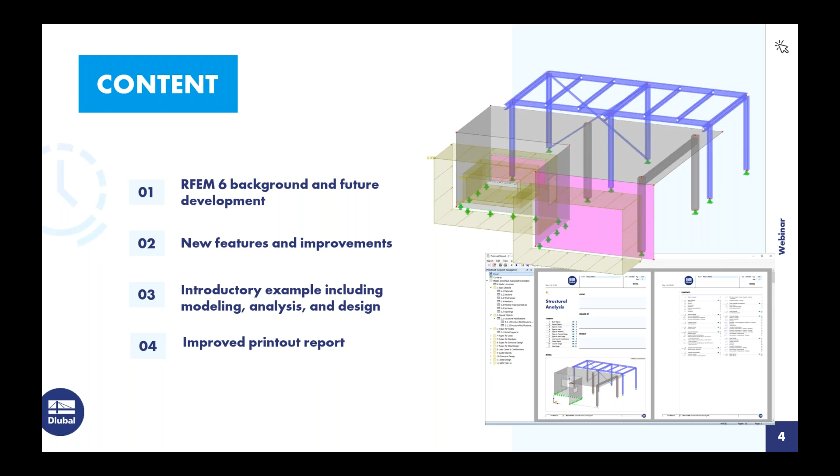So RFEM 6 was released several weeks ago. It was actually developed in parallel over the past several years with RFEM 5 as well. Now, this new program generation isn't just a minor modification of RFEM 5. Actually, we have completely rewritten the program in a modern framework programming language. This is C++ with Qt. So this first release will certainly include a lot of new features, but I do want to be clear that not all of the capabilities of RFEM 5 are yet developed for this first release.

And in particular, this might include glass design, cross-laminated timber, some BIM integration. So what we plan are several release phases for this ongoing development that you can expect in the coming months. What this also means is that you'll have frequent access to updates in the Dlubal extranet account. So for current customers with RFEM 6 and a valid service contract, we're coming out with these updates almost weekly now because development has been so heavy and rapid with this new generation.

However, we plan to fully support RFEM 5 for this 1 to 2 year overlap period. We definitely recognize that there's many users who need the capabilities for cross-laminated timber, for example. So you can continue using RFEM 5 as you would as normal. Again, we'll continue fully supporting that until those features are available in RFEM 6, then maybe you want to consider upgrading. There is forward compatibility with RFEM 5 to RFEM 6, so you can open these older models in this new version. For the most part, you're going to see a lot of the geometry, the loading carryover, but what you will now lose is the add-on module data. And the reason for this is that we have better integrated these add-ons in the main program, so there's no way to keep that compatibility between the two versions.

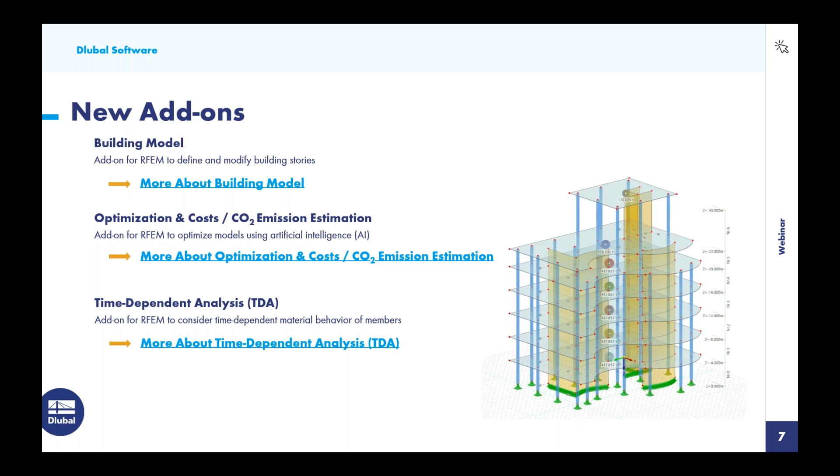Previously we saw in RFEM 5, we would complete the full analysis, then we can move into the design portion. Well, now we're able to do both the analysis and the design within one workflow for a much more efficient process. You'll also see the output of design formulas from the relevant standards.

Member and member set representatives, which you'll also see in today's example, allow us to group members together. Instead of setting individual settings for each member, we can now group them together to set input, such as for concrete, the reinforcement for an entire set of columns, or for beam design according to the AISC, I can set my unbraced lengths for a group of members.

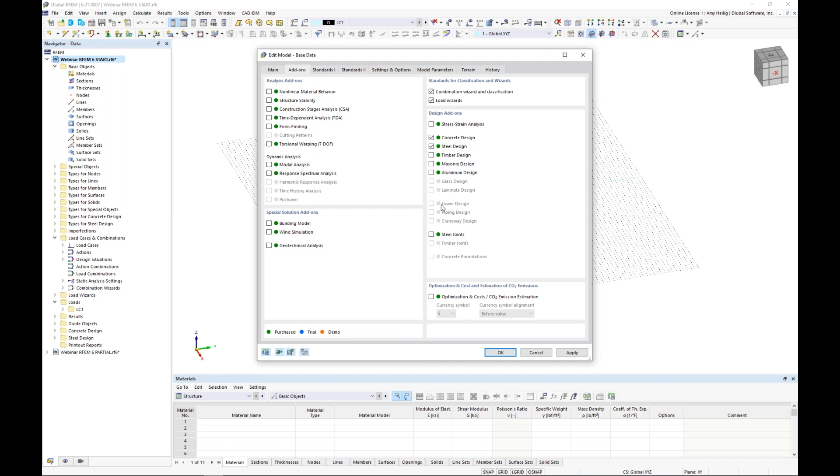For today's example, I've turned on the concrete and the steel design add-ons. Some of these others that are grayed out just means they are in development and will be released in future phases that I discussed earlier.

Under the Standards tab, because I have activated both the concrete and steel design, we now want to select our standard here. This is significantly different as well—when you purchase the steel design or concrete design, timber, aluminum, and so on, you now have access to all standards. So under steel, you have access to the Euro code, American code, Canadian, Chinese, and so on. Same concept for concrete, as we'll see within the dropdown.

Now the load cases and combinations—this is automatically included with RFEM, so we can select one of the given standards here. Today we'll be utilizing the ASCE 7.

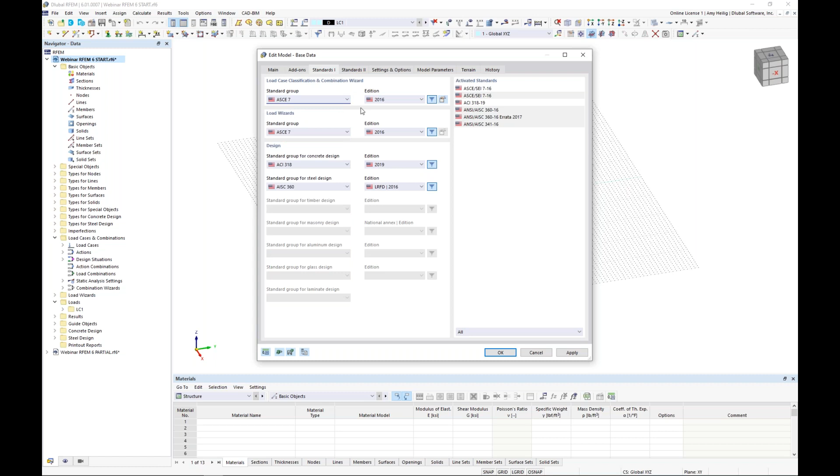Under the settings and options, this is where we would want to modify our global axes. So I'm going to orient my Z axis upward, and my local axes for my members and surfaces—my local Z will be oriented upward as well.

Once we have defined all of this information, we are now brought into the main program. So we have our graphical interface here, our tables to work with down at the bottom, our project navigator, and our tools up at the top—a lot of similarities to what we saw with the previous version.

As we move along today with modeling, I'm going to point out the differences as well. You'll also notice that I'm working in a white background. I think when you first install, you'll find that it's actually a black background. Under options, display properties, you can really control any of the colors, the font sizes, the element sizes within this dialog box.

Down at the very bottom, you can quickly load a dark background or a white background. Also at the very bottom of the screen are our grid settings. I can right-click and edit this—I've set my grid point spacing to 1 foot, and I've also set this to 50 feet on either side of the origin.

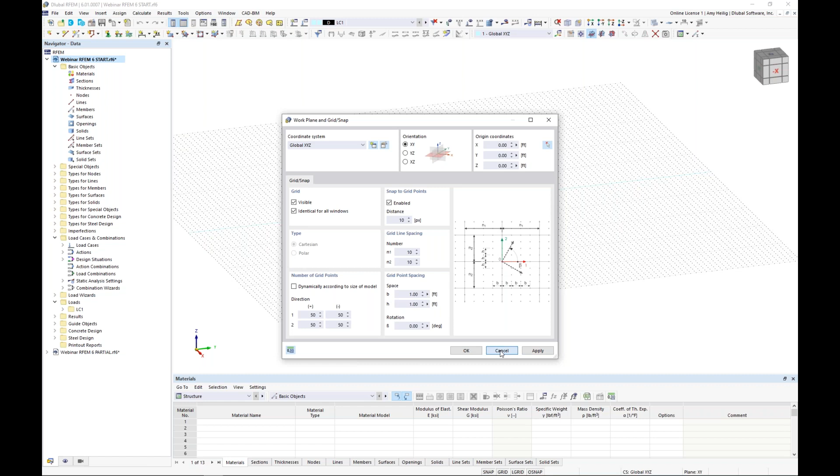Now, obviously, if we're working in a much smaller scale, let's say an FEA of a connection, we'd probably want to change this to inches, which we can access in our units and set the grid point spacing to something much smaller. Our O-snap settings, our object snaps in other words, might be familiar from AutoCAD, where we can turn on and off different snap options, such as perpendicular, parallel, quarter points, and so on.

So let us begin today by creating several nodes. I'm going to go up to my toolbar to create my first node, and I can either select any point within my drawing grid, or automatically input the coordinates such as 0, 0, 0. I hit enter on my keyboard. That node is hidden here at the origin behind these axes, so we'll just have to trust that it's there for now.

The next node will be 19.5, 30, and 0—I hit enter. We can see that generated over here. The third node is going to be negative 18.5, 15, and 0. Now, be careful not to move my mouse out of this dialog box, otherwise you'll see that the program will automatically snap to where my mouse is currently located. So we input that third node here, and we can right-click to exit.

So I'm going to draw my first surface, and I will go up here to my tools to create a new rectangular surface. The stiffness type is going to be set to standard. Now this is something that's a little bit different. We're now going to create a new thickness, and if we launch this dialog box, it will be set to 8 inches.

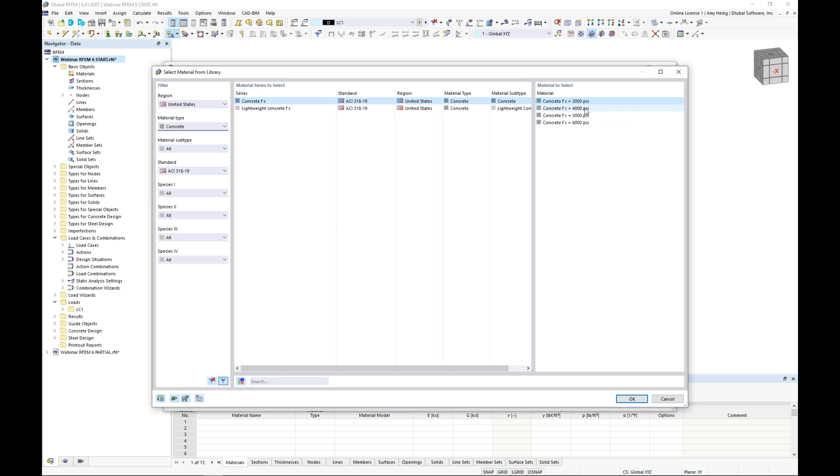Now I also can set the material here for my first surface. So we can visit our material library, and I can take advantage of my filters on the left to filter to the United States. The material type will be set to concrete, and I can choose ACI 318 2019, normal weight concrete, 4,000 PSI. Now you can see that material is set here. I click OK, and we can see the thickness and material are both generated.

Notice there are several tabs up here at the top. This is the new concept that the design portion is integrated within the main program. All of these tabs are specific to the reinforcement according to the ACI for this particular surface. So in reality, we'd probably want to define this input data as well, but for now, just for the sake of this example and workflow, I'm going to turn off my design properties. I'm only concerned with the analysis right now. We'll revisit this at a later time.

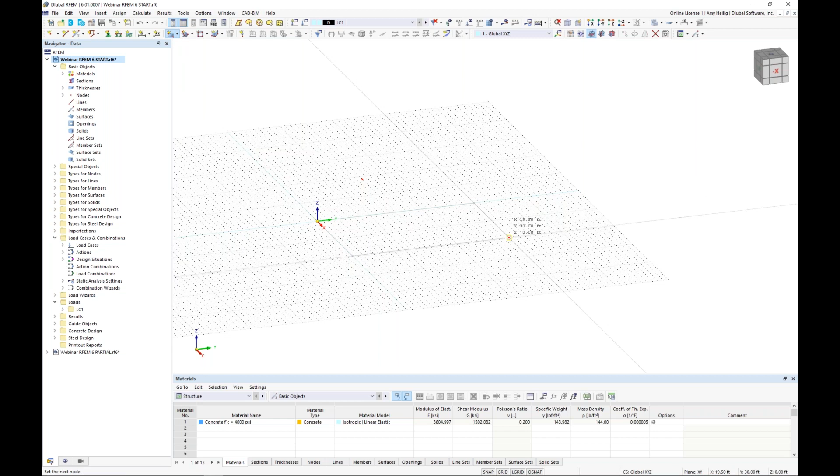I click OK, and I will snap from this origin point down here to my second node, and I'm going to do the same concept for my second surface. Now I have two continuous surfaces here. Realistically, this is the same as modeling one surface, meaning we'll have full force transfer between these two surfaces.

But if I wanted to clean up the model a bit to truly create one continuous surface, I'll use this tool to connect my lines or members. I'll highlight over this node to break apart this line, select this line, and hit delete on my keyboard. So now I'm just left with the boundary lines of what will be my surface.

So instead of creating a new rectangular surface, I now select my boundary lines. I do not need to redefine my thickness or material—it's already available within these drop-down options. I turn off my design properties, click OK to highlight the lines, and now we can see that we have one continuous surface here.

I'm going to take these three lines located at the upper portion of this surface. I can right click to take advantage of this tool, extrude the line into a surface for my wall elements. I'm going to extrude this in the negative Z direction, 12 feet. You'll notice that my material and thickness can also be set here from my previous options.

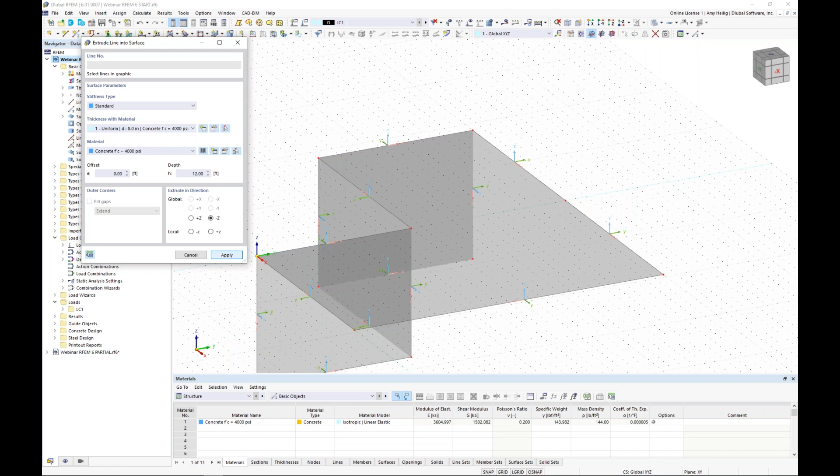And now we have our wall options. I'm going to hold down my control key to select these three walls, double click to open them, and turn off the design properties for now of these wall elements as well. So notice all of those additional tabs are now gone.

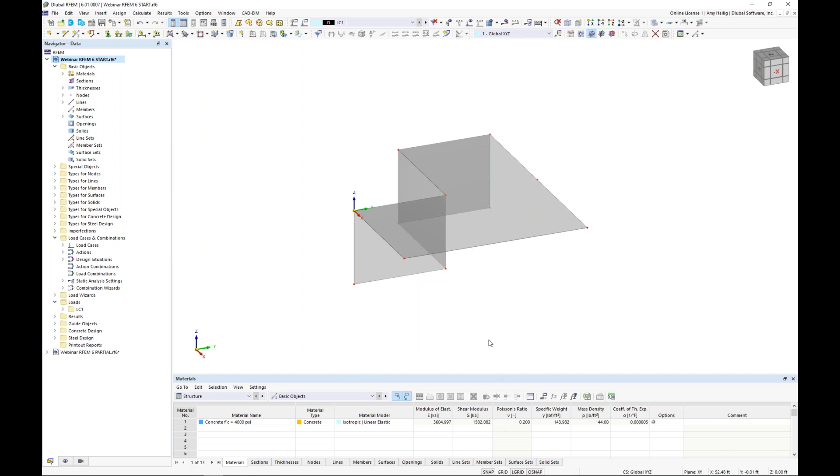So now we want to move on to drawing a few members. I'll turn off my grid settings here, and let me turn this into wireframe just so it's a little easier for you guys to view. I'm going to create some additional nodes where I want those columns to frame into this slab element.

So we'll go back to drawing a new node, and I'll input my dimensions manually: 16.5, 3.5, and 0. I hit enter. I will input my second node of 16.5, 26.5, 0. And my final third node is going to be at 0.5, 26.5, and 0. So now that we have these three nodes generated, I'm going to hold down my control key.

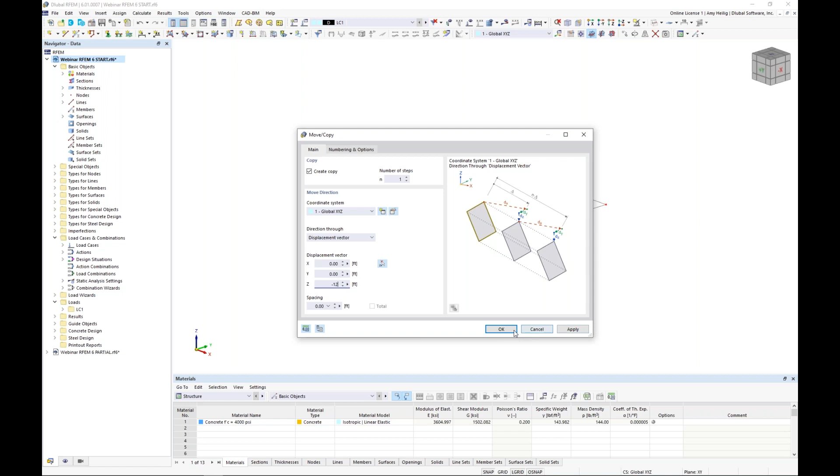This is where the column will be framing into the slab. I'm going to use my move copy tool, also located in my toolbar, to create one copy, negative 12 feet in the Z direction, and I click OK. So now I've simply defined where I want the start coordinates of my columns to be at the bottom of my structure.

So let us begin by drawing our first member. I can go up to my toolbar to select new single member. Now the member type is shown here within the dropdown. A beam is anything that's a typical beam or column. Of course, we have tension only, compression only, cable elements if we'd like, but for now, for this typical column, we want to choose the beam member type.

Now under the second tab is the cross section. Right now we don't have any cross sections defined. I'll visit my cross section library, and we can see our steel cross sections here, which refer back to the AISC or the CSA standard. We have some parametric thin walled and parametric massive sections.

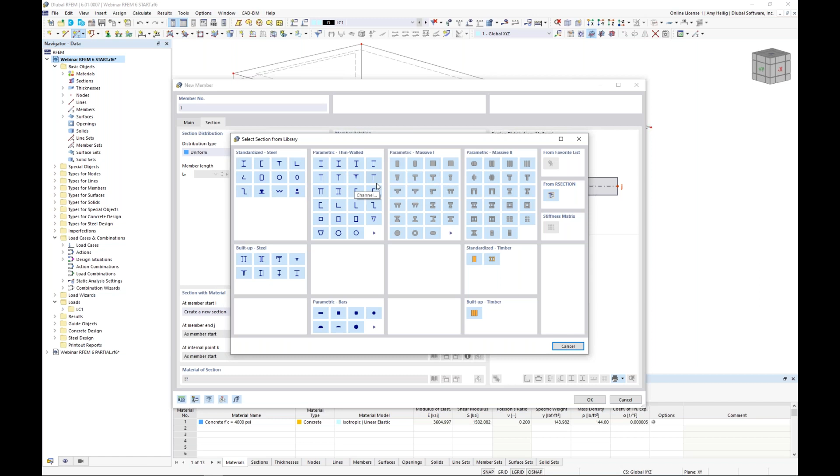For my concrete column, I want to choose a massive square. Now, I don't need to define my material. I can use the same 4,000 PSI concrete, but if by chance we were defining a steel member, for example, we could set a new material here.

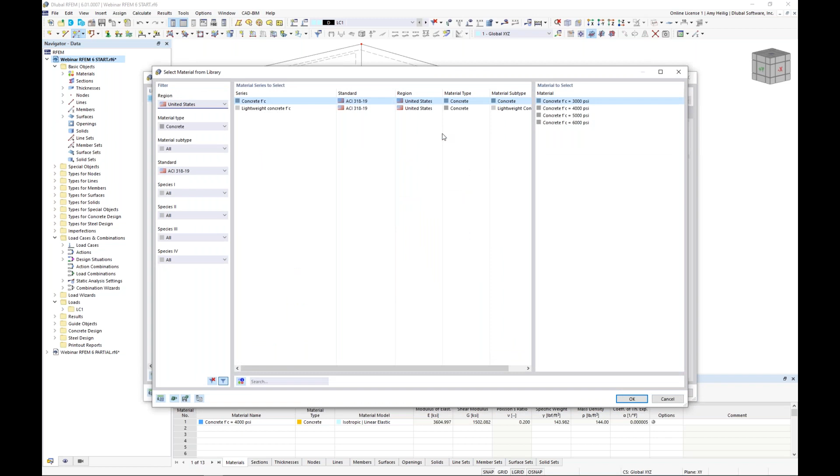By going into our material library, and over on the left, instead of concrete, we'll filter to steel, and we can choose the AISC 360. Now here are all of my materials, such as A992, if we wanted to select it, and now that material will be available to us for all of our members. But of course, this is a concrete column, so we'll stick with the 4,000 PSI.

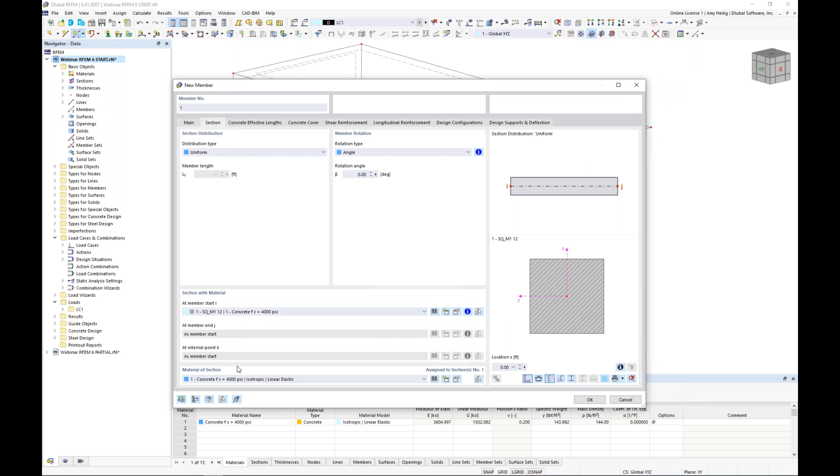Taking a look at our second tab here, this will be where we set our dimensions. I'm going to choose 12 inches for my cross section. Under these section values, the program will automatically update to consider the cross section values calculated automatically. I click OK because now I have defined that cross section. You'll see the material is defined here as well.

Now, going back to the main tab, we have all of these additional tabs that are specific to the reinforcement design for the ACI standard and that concrete add-on that we have activated. I'll turn this off for now, something we'll get into a little bit later, and all of those tabs now disappear. The member is considered fully fixed when we leave everything as default here.

If we wanted to add in a moment release, we would just simply select the hinges here, and up pops a new tab where we can create a new hinge type. The program is automatically going to suggest that we'd like a moment release, so we'll release the moment about the local Y and local Z. Once we define that moment release, we can select it at the member start and member end.

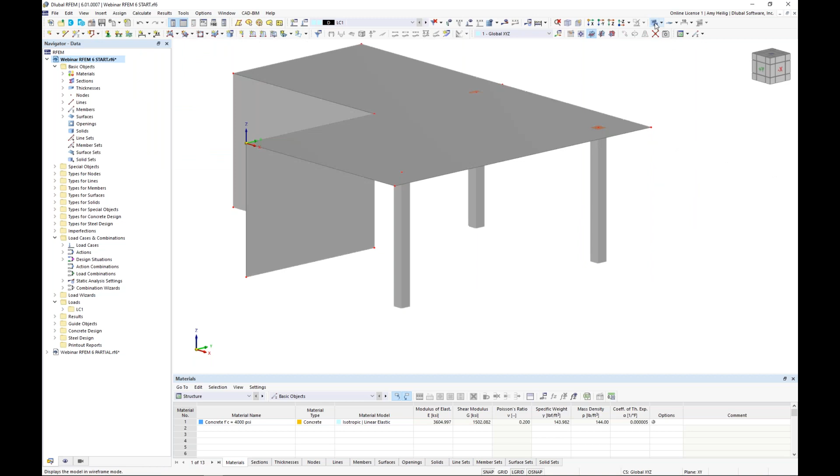Now for my concrete members, I want everything fully fixed, so I'll just go ahead and deactivate the hinges. We're ready to snap from this bottom point up to this top point here to draw in our first column members. I can render this and we can see those square sections framing into our slab element.

Now I also want to draw a beam that spans between these two columns. I'll come up here to draw a new member. The member type for this example will be beam, but we also have options such as rib. If we visit the second tab here, we have the ability to set the rib on the underside of that surface. We can design this as a T-beam according to the ACI standard, integrating those internal forces.

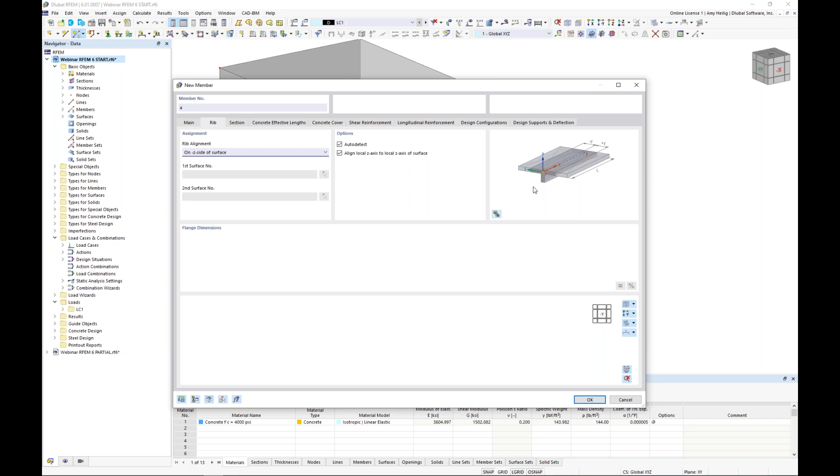For this example, I'll just keep this as a typical beam element. Again, I'm going to uncheck these design properties. I do, though, under the second tab, want to create a new cross section. So I go to my section library, and instead of a square section, I'll choose a rectangular massive section, 4,000 PSI concrete, and under this second tab, I'm going to input my cross section dimensions of 10 inches by 12 inches, and I click OK. We can see that's automatically updated here.

I click OK, and it's really just as easy as snapping from the top point of the left column to the top point of the right column. So we're primarily done drawing these concrete elements for this portion of the structure.

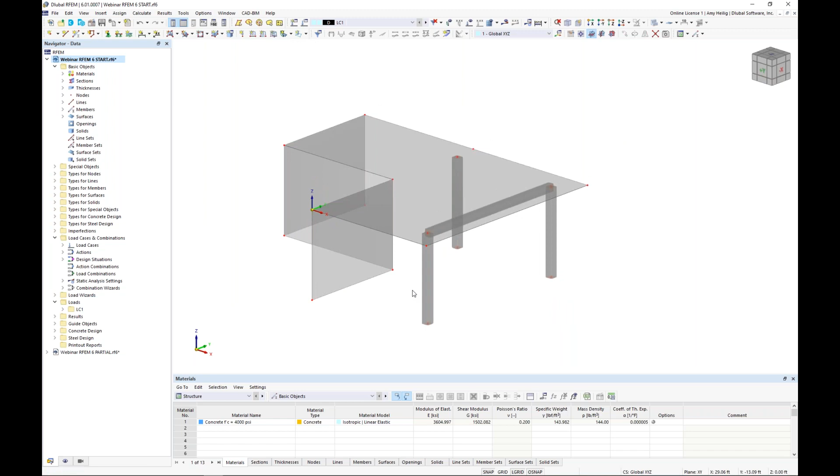What I want to do now is to add in some openings for my wall elements. We can do this by turning back on our grid, and I want to change the orientation of this drawing grid. You'll notice I do that with my toolbar, and now my grid is kind of oriented parallel along this middle wall. The purpose of the drawing grid is just so it confines us to this particular plane, so we're not snapping to points that are clear off in space.

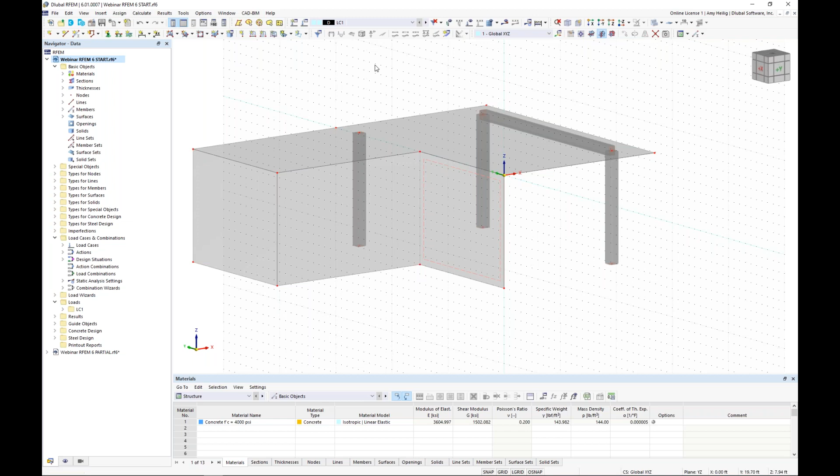This can be used for our new opening, which we can select from our toolbar here, new rectangular opening, and we just simply select a couple arbitrary points. I want to change my drawing grid now to a different plane.

I'm going to change the origin here as well with this helpful tool where I can snap to the upper left corner of my intermediate wall. We can see now the drawing grid oriented along this plane, and now I can add in my new rectangular opening, perhaps a little bit bigger than the last one, and we can see that shown here.

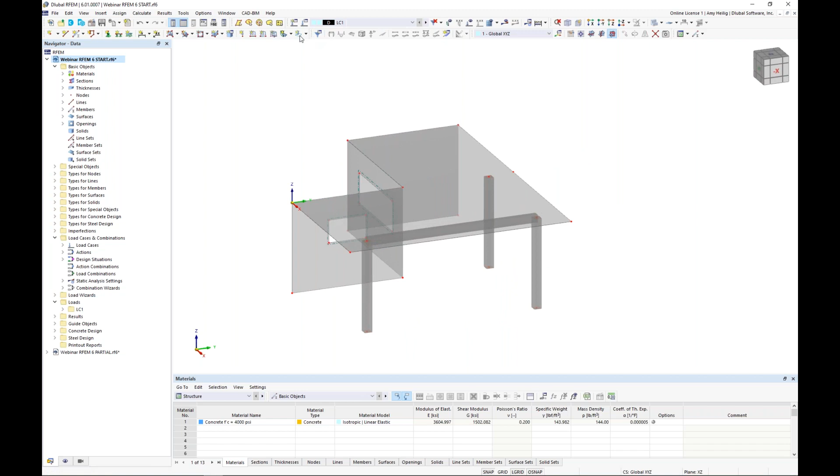So this just gives you a general idea of how we can model both members and surfaces within the program. Now, for the sake of time, I am going to jump to an already saved model here where I went ahead and modeled all of the steel members as well. Again, the exact same process can be followed.

Maybe you'll notice here a couple differences. First of all, I'm displaying the cross sections according to these various colors, and we did this under the display navigator over here. You can scroll all the way down to the bottom where we can change the colors according to the member section, for example, just for a clear look at exactly what cross sections we're using.

All W sections except for my cross bracing here, which you can see I defined as tension-only members and single angles. Notice the hinges are grayed out here. For some of these options like tension-only or compression-only, we're going to assume that you have a moment release, so that's actually applied in the background.

You'll also notice too that I have these main members here on the left and the right-hand side with these intermediate members framing into the weak axis, and these are applied along these particular nodes. This will come into play a little bit later on when we have a discussion about unbraced lengths.

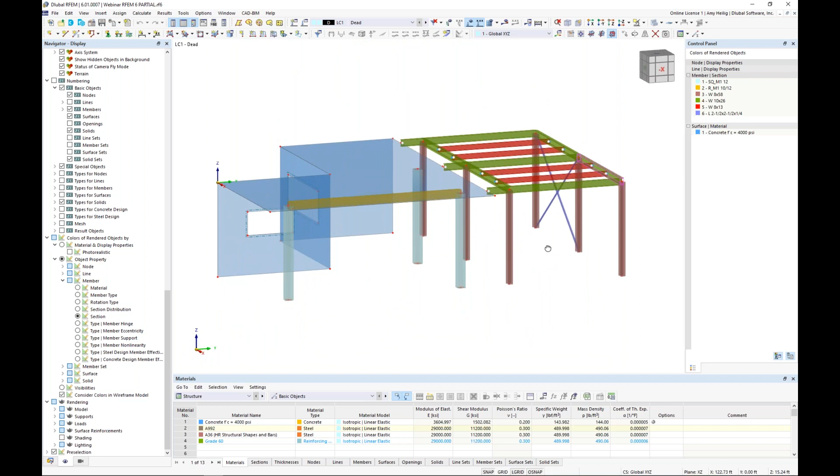So what we need to do now is to support our structure, now that all of our members and surfaces are modeled. We'll come up here to our new nodal support and create a new nodal support definition. We have here 6 degrees of freedom, 3 in translation, 3 in rotation. The program automatically suggests we want some type of pin support, so we will restrain translation and we will go ahead and restrain rotation about the global Z-axis.

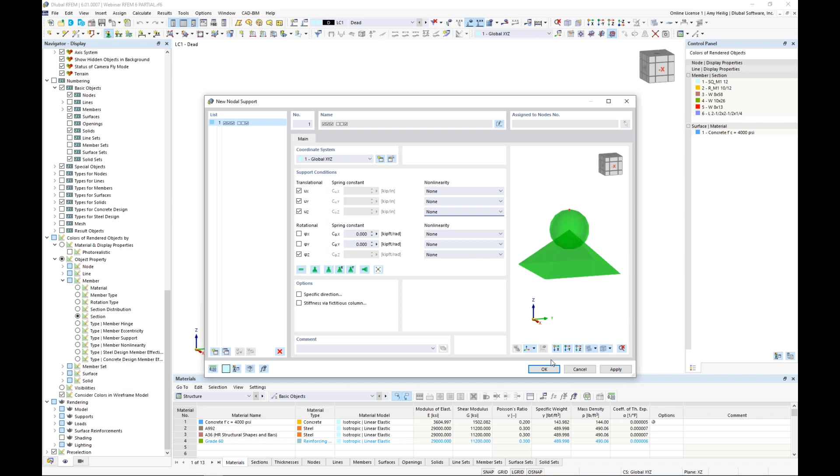Now there is the ability to define here partial fixities with a spring constant or nonlinearities as well. So for example, if you want this support to fail in uplift, that's also possible. So defining this simple pin support, I click OK, and now I just need to highlight over the bottoms of all of my columns, and to choose this column over here on the left-hand side.

The line support for the bottom of the walls follows the exact same concept. We're going to create a new line support definition, and we can see our 6 degrees of freedom. For a line support, we only need to restrain this in the translation directions. I click OK, and you can see here that I can go ahead and select my lines, and I'm going to select the bottoms of my walls, so I can graphically select those. I click OK, and now we can see the line supports at the bottom there.

All right, so modeling is essentially complete. Let us move on to loading. For this, you'll notice that I do have my drop-down box here with one default load case already defined. So let us go into the Edit Load Cases and Combinations dialog box. The first tab here references what we have already set in that base data. We are going to generate our load cases and combinations according to the ASCE7.

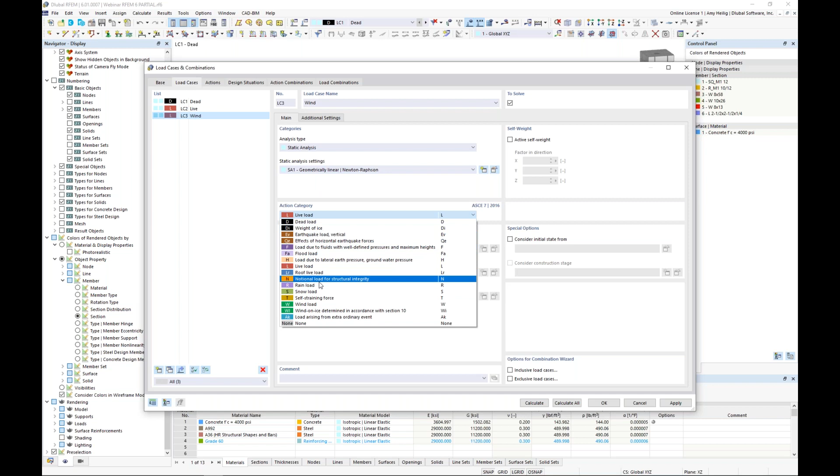I have activated this combination wizard here. Under the load case, the first load case defined is dead load with the action category set to dead according to the ASCE7. Notice self-weight is active here, -1 in the global Z direction. I'm going to create my second load case, which will be live load with the action category set to live. Notice self-weight is unchecked here because we do not want to account for it twice. And finally, my third simple load case for today will be wind load with the action category set to wind. All 3 of these load cases are set according to a first order linear analysis, which is typically fine for load cases.

So then we jump to this design situations tab, and this is somewhat of a new concept within RFEM 6. We have 2 design situations created here, our LRFD and ASD. Now we know LRFD is going to be all of our factored load combinations, and ASD is going to be all of our unfactored load combinations.

You can see that I have activated these for both concrete and steel design. This will come into play a little bit later on for the design portion of the structure.

Under the load combinations, this is where we will see our load combinations individually listed out based on the load cases we've defined. Here in orange are my factored load combinations, and here in red are my unfactored load combinations. Now, all of these are run according to a second order analysis, so both big P-delta and little p-delta nonlinear as well.

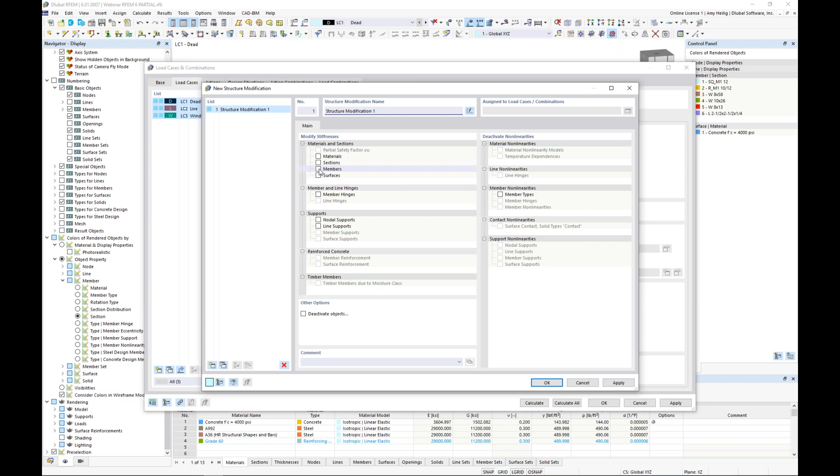Before we move on, there's one more topic I want to discuss. I'm going to select all of my load cases here and activate what's called the structure modification. With this structure modification, we want to create a new definition here. I have the ability for several options, but I'm going to focus on the modify stiffnesses for my members and my surfaces. Now we get two additional tabs.

Under the members, this is where we want to use our drop down here to define a new stiffness modification. When you are working with either the US or the Canadian standards, concrete or steel, these are both relevant. Topics such as the I cracked factor for concrete are not by default applied to these elements. We need to come in here and tell the program, let's modify the stiffness for the analysis to apply this I crack factor. So we'll select the ACI from the drop-down box.

We will select our columns to apply an I crack factor of 0.7 to the bending stiffness. I click OK, and then in this second cell is where I can graphically select all three of my columns that this I crack factor will apply to.

In a similar fashion, I choose a new member stiffness type according to the ACI, but this time I want to choose beams for a different I crack factor of 0.35. For this, I am going to graphically select my beam element here.

Now, the third definition is going to be related to the AISC 360. For steel design, we know that if we are designing according to Chapter C and the direct analysis method, we need to apply this tau sub B as well as this 0.8 stiffness reduction factor to our members. I'm not going to get too much into the details with this—we can cover these in later webinars specific to steel design, for example—but we do want to apply these stiffness reduction factors for our steel members. Therefore, we will graphically select all of our steel members here.

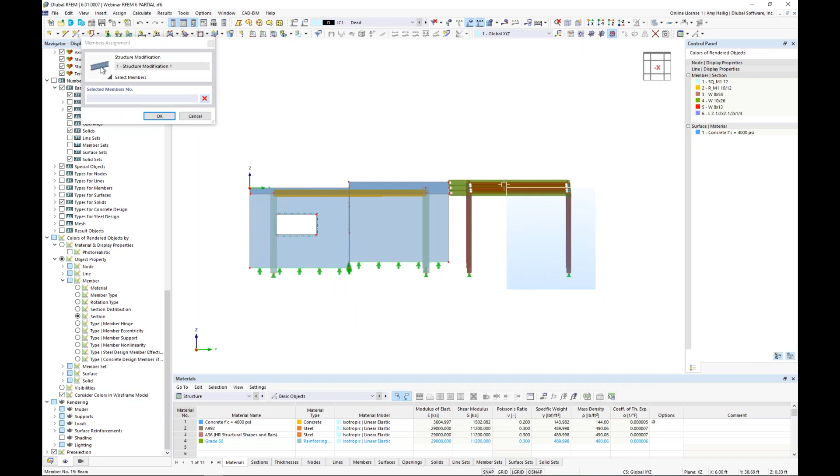I click OK. Then under the Surfaces tab, we want to create a new definition. We're going to jump back to the ACI, and this time we want to choose the option Walls Uncracked for a stiffness modification I cracked factor of 0.7. I click OK, and then under my surfaces, I'm going to select all of my wall elements, of which there are only 3.

For my second definition here, I create a new stiffness modification. This one is going to be according to the ACI, and for flat plates and flat slabs, an I crack factor of 0.25. We're going to select our only slab element here, surface number 1. So now I have applied these stiffness modifications to be considered for all 3 of these load cases.

Under the load combinations, we need to highlight all elements. I activate the structure modification—I don't need to redefine it, it's already available here within my dropdown. But it's important that if there's a scenario where you don't want to reduce the stiffness for serviceability, for example, well, maybe we uncheck these options for unfactored load cases. So many options there, but for now, we'll keep everything active.

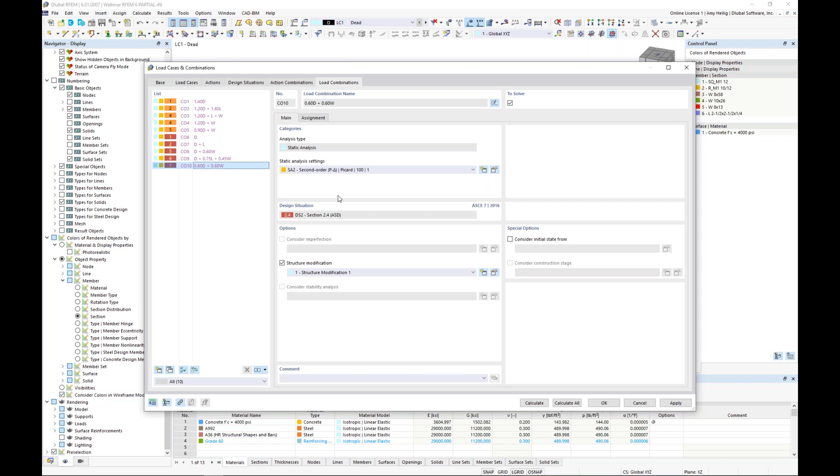Okay, so now that we have defined and set up all of our load cases and load combinations, we can see these reflected here within our dropdown, and we're now finally ready to actually apply the loads to the structure.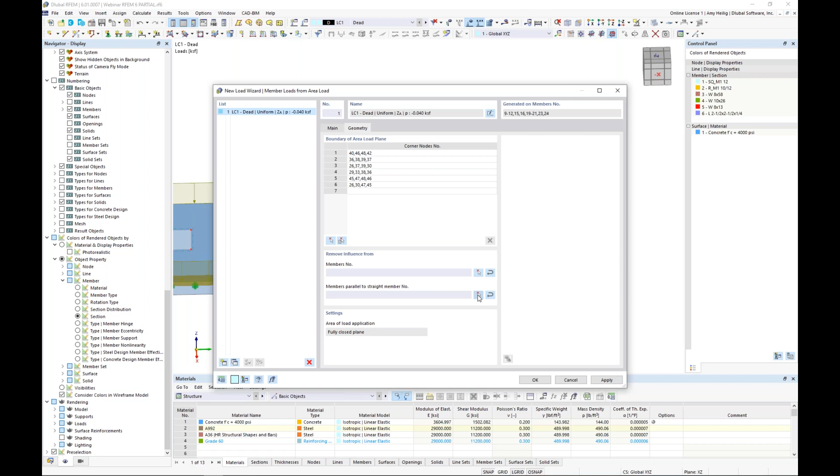All of the relevant members are selected here, and I click OK. Now, if I want to remove the influence of this area load for any of these members, because we have a one-way area load distribution, I can choose member number 11, and tell the program: remove the influence of all members that are parallel to it. So when I click OK, we'll see our area load applied.

We can take this a step further by right-clicking and displaying separately. Now we have neglected the influence from all those members framing along the global x-axis. All the tributary areas are automatically considered, and we have our nice member area load shown here under dead load. A couple nice new features within RFEM 6.

If we wanted to adjust the size, we can simply right-click on the load, and you'll notice that size can either increase or decrease depending on this sliding scale here.

Additionally, if we add in this area load and we're thinking we really meant to apply that to live load, it's really not a problem now that we can just easily double-click on the load and change the load case within this drop-down box here.

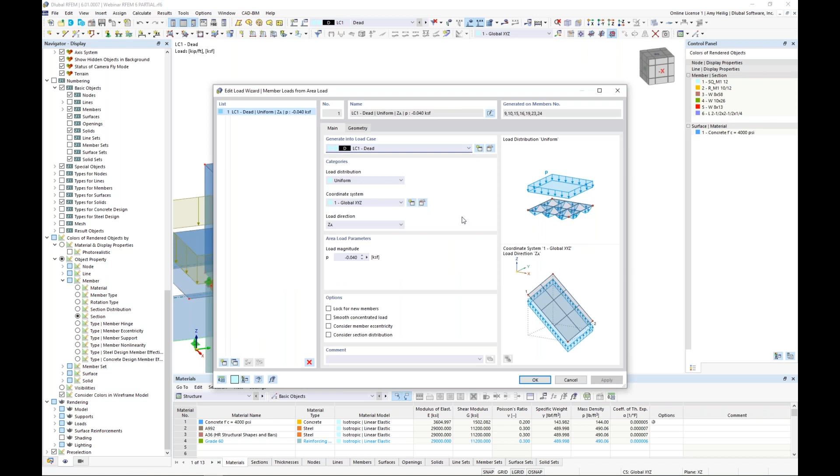Okay, so that will wrap up dead load, and we want to move on to live load. Now for my live load, I'd like to apply a load to my surface, but not the entire surface area.

So what we can take advantage of within our drop-down box up here at the top is the new free rectangular load. The free rectangular load allows me to once again specify a magnitude here of -0.1 kips per square foot. And I'm going to assign this to surface number 1.

I can graphically select it, or I can just type in number 1 here. And then I can choose my coordinate points of where this load should be located on the surface.

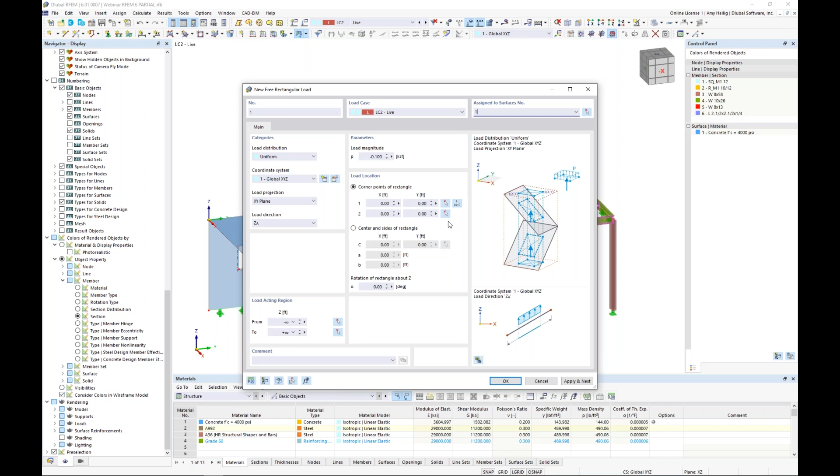Now we have the ability to project down this load over several surfaces. So for example, if you have a multi-level story structure, and the live load occurs at the same location at every single story level, then you can apply this to multiple surfaces at once, and the load will be projected down through that elevation. So for this, I'm just going to select surface number 1.

I'm going to choose my upper left corner point here and my lower right corner point here, and the coordinates are automatically updated. I click OK, and now we can see that live load applied to only a partial area of the structure.

Now for my wind load, we just want to have a basic application here in the lateral Y direction. So I'll start off with a new surface load, in the global Y direction this time with a load magnitude of 0.03 kips per square foot.

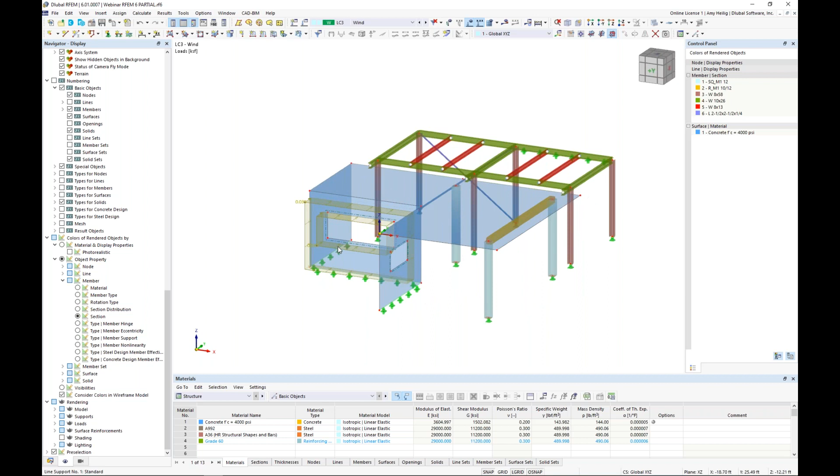I click OK, I can graphically select this surface, click OK once again, and we see our simple lateral load applied to this wall. But we might be asking ourselves, well, we're certainly going to have a window in this area that will be essentially distributing the wind load to the outer perimeter here of this surface. So how do we consider that?

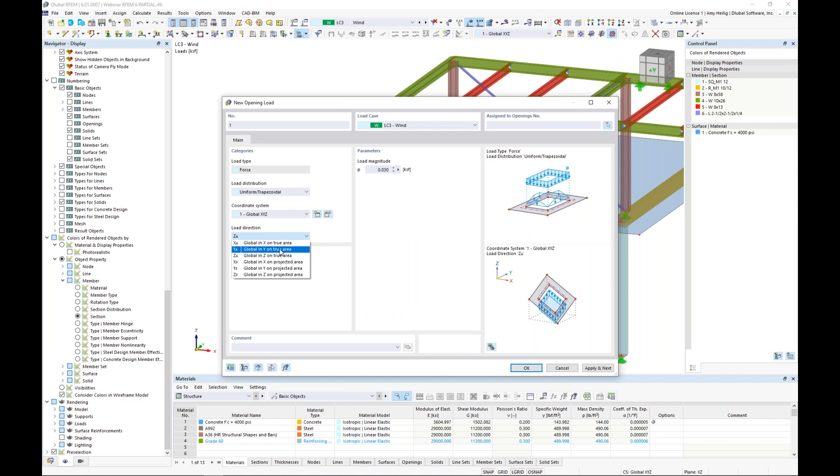Well, we've also added in a new quick feature here called new opening load. So we launch this dialog box, we simply type in the load magnitude again, 0.03 in the global Y direction. We click OK, and we can easily just click on that opening. Now we can see that load applied to the outer perimeter of that opening.

In a similar fashion, let's consider that maybe in this entire open area here we have some type of facade wall. We didn't model the facade wall because it's not really contributing structurally to this particular model, but I'd like to consider it for wind loads.

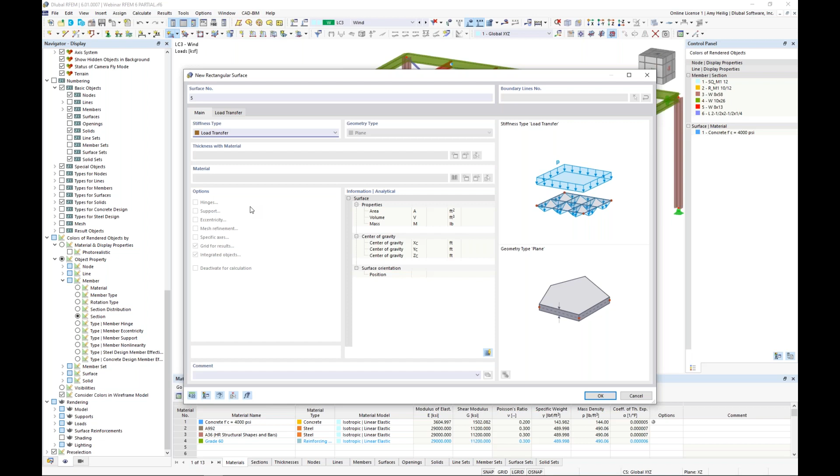I'd like to introduce you to a new feature available under our surfaces option: the new rectangular surface. Now the stiffness type, instead of standard, is set to load transfer. The surface type is exactly as the name implies—it's used to transfer loads. It does not add any stiffness to the model. You'll notice the thickness, the material, all of these options are grayed out. It's really just a tool to be used for area load distributions.

If we jump to the load transfer tab, you can see here we can set either a one-way or two-way area load distribution. So we'll set this to both directions. You can add in a surface weight, and consider many other options here within this dialog box.

When I click OK, I'm going to draw this new surface by turning on my drawing grid. It's already oriented in the plane I'd like it. I'm going to snap from this point at the bottom of my structure up to the top, and now we can see that new surface applied here shown in red.

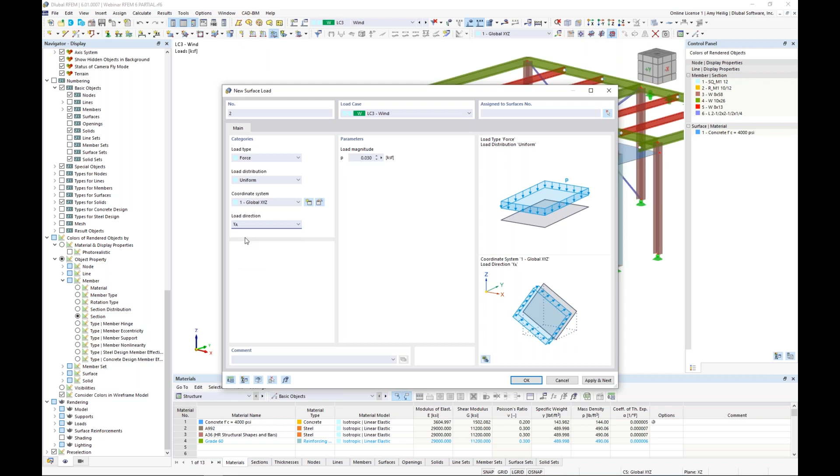Again, I'm not adding any stiffness or material, nothing. It's really just used so that now I can go up to my new surface load, apply a load magnitude of 0.03 in the global Y direction, just like what we saw with the previous wall before. I click OK, and I can now highlight this new surface and see that load applied here.

If we're curious what's going on in the background, we scroll up to our navigator, under the display options, which just control everything I'm seeing visually. We can turn things on or off, or change display type settings. Under basic objects for surfaces, we can turn on the display of the load transfer separately, so now we see these line loads being distributed to the structure.

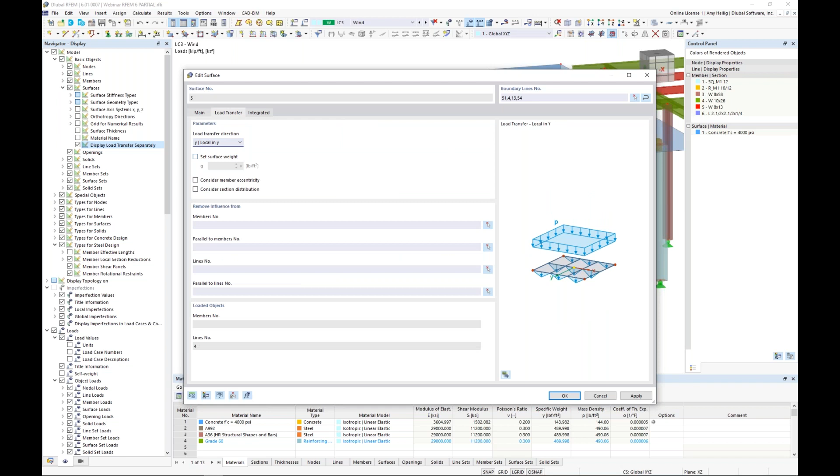We have a single vertical line load and a horizontal line load. If we decide we'd really like a one-way area load distribution instead, no problem—just double click on this surface, and under load transfer, change this to the local Y direction. I click OK, and now we see a single line load oriented here towards this top slab element.

Okay, so now we have defined all of our various loads. We can view them displayed together for all of these different load combinations, considering the relevant load factors. A few more things to take care of before we're ready to run that analysis and design.

The first is the FE mesh settings. So under calculate, mesh settings, this is where we can choose our target length of our finite elements. You can see I've set this to 1 foot. So now when I click OK and apply, the program says line number 34 cannot have a line support assigned.

Let's go to the table here. It says I have a line support assigned to line 34. Let's go ahead and turn that off. Okay, so going back to calculate, mesh settings, 1 foot, we click OK and apply.

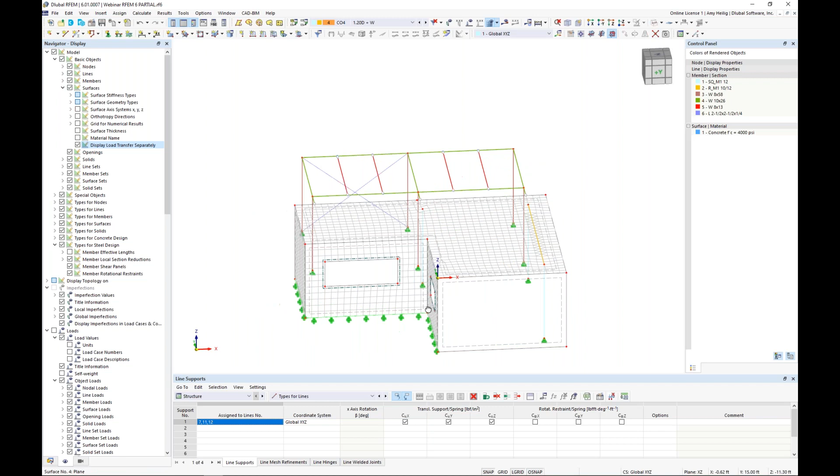And now you can see that the mesh is going to be generated here. Let me turn this into wireframe view. The program will automatically generate this mesh, tying it into all of the relevant openings, the nodes, the members, everything automatically for you. So everything looks quite nice here. Of course, we'd want to modify those mesh settings depending on how large or small our elements are within our model.

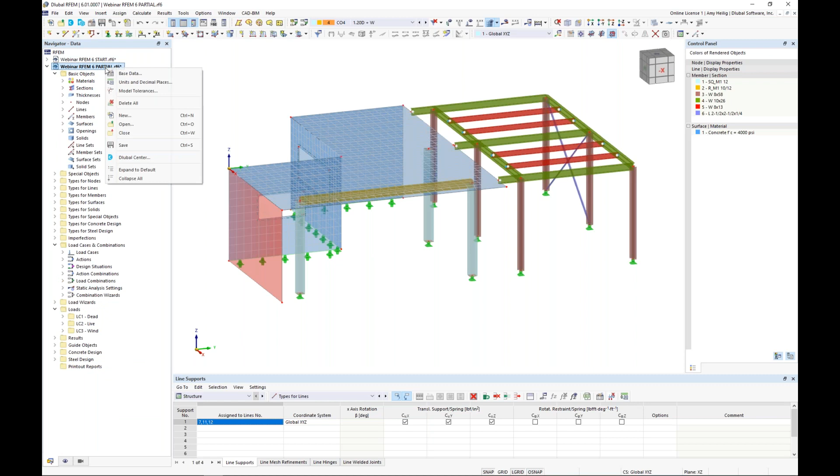Okay, so now that we've addressed most everything related to the analysis, I'm going to jump now to the design. Remember, the huge advantage of these integrated add-ons is the ability to do the analysis and design together. So let's start off by going back to our base data, and I can right-click here to launch that dialog box. Under settings and options, we now have what's called the member representatives.

And you can see now we have an additional tab shown here. So what this does when I go back into RFEM, I'll turn this into wireframe view, and also turn off my mesh settings to make this a little bit more clear. You'll see all of these different color codings here. The program has actually grouped together members that have similar materials, cross sections, and lengths, which we can also see in our navigator.

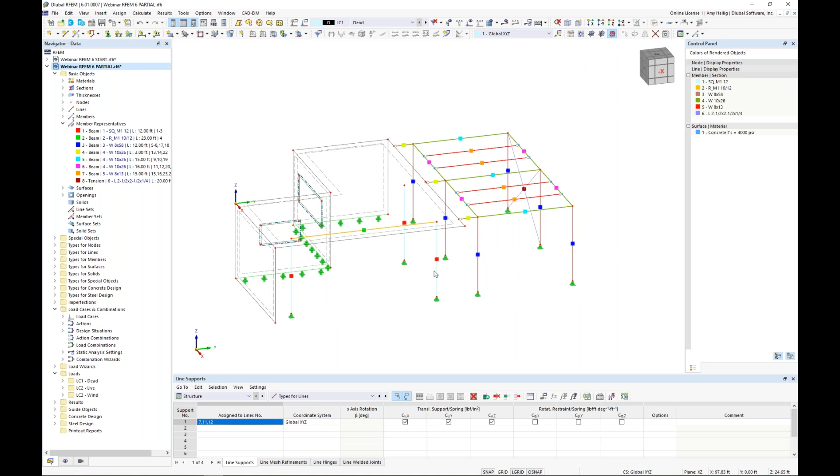So what does this give us the ability to do? This is really helpful for the design aspect. You'll notice I have my 3 concrete columns indicated by this red member representative. If I double click on it to edit it, it brings up my member representative dialog box here, and you can see that this includes members 1 through 3. So what I'm going to do is go to these edit member settings.

If you remember way back when, we had deactivated these design properties, so let's activate those again, and we see all of our various tabs along the top here. But I am not going to change the reinforcement settings here for each individual member. Rather, when I click OK, notice my member representatives have the exact same tabs. This allows me to set the same reinforcement for all 3 of my columns at that floor together. If I were to make any changes, I come in here to the member representative to make those changes rather than each individual member, and every member associated with it—for our example today, members 1 through 3—will automatically be updated.

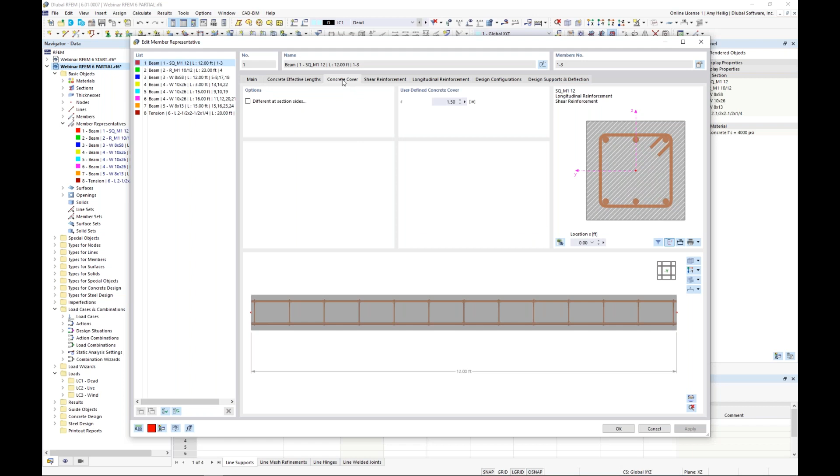So how is this relevant? Let us take a look at some of these tabs here. For example, the concrete cover, we can set this to 1.5 inches. The shear reinforcement, this is where we want to initially define our material here for our rebar.

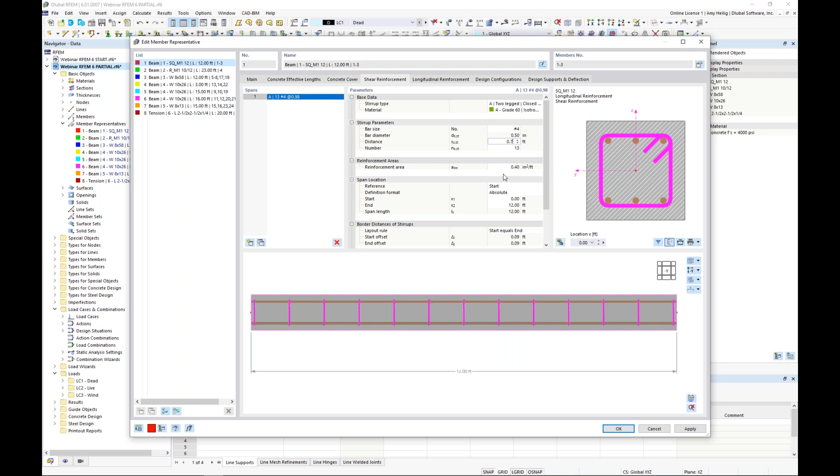So for this, we would typically need to go to our material library, and we can visit it here using our filters over on the left. We can set this to reinforcing steel according to the ACI, and we choose grade 60. Once this material is set within RFEM, we can now select it here for our shear reinforcement, and perhaps we'd like to use number 4s with a spacing of 0.75 feet or 9 inches. Now you can see that this nice picture updates here with our shear reinforcement.

Longitudinal reinforcement, same concept. This time though, we will select a uniformly surrounding distribution, and we're going to leave this as grade 60. We'll select 8 bars and choose number 7s from our drop-down box here, and again this picture will update automatically. I'm not going to get too much into all of these details—we'll cover this in some additional webinars where we can spend much more time on concrete design.

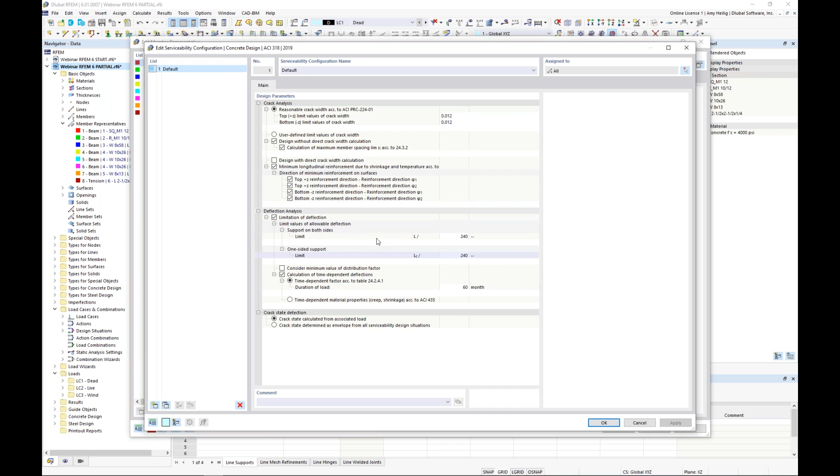The design configurations are specific to our ACI design, since we've activated that concrete add-on. Of course, we want to do design according to strength and according to serviceability. Inside these details are all of these different settings specific to strength design according to the ACI that we can adjust, turn on or off, or maybe not touch at all. Same concept for serviceability—related to the ACI, we're talking about crack analysis, shrinkage and temperature for our surface reinforcement, as well as deflection. We can set our limiting deflection ratios here for our concrete elements.

So once I have set this reinforcement, I can click OK, and you'll notice here that my reinforcement is now shown visually for these elements.

In a very similar manner, we want to design a few of these steel members. I'm going to double click on this pink member representative, and you'll notice that this includes members 11, 12, 20, and 21. Just like what we did with the concrete columns, I'm going to go into my edit members and turn back on those design properties. Now we have these additional tabs up at the top that are specific for AISC design, such as unbraced length—very important topic. But again, I am not making these changes here for each individual member, I'm going to set them within this member representative.

If we take a look at the design types here, the initial setting is the effective length, so we want to create a new effective length. This covers unbraced lengths for weak axis buckling, strong axis buckling, lateral torsional, and flexural torsional buckling.

Again, very important topics. Under this second tab, the program automatically sets the nodal supports at the member end. But remember, we have these additional smaller W sections framing into the weak axis, and I want the program to automatically detect these members rather than having to manually set that unbraced length.

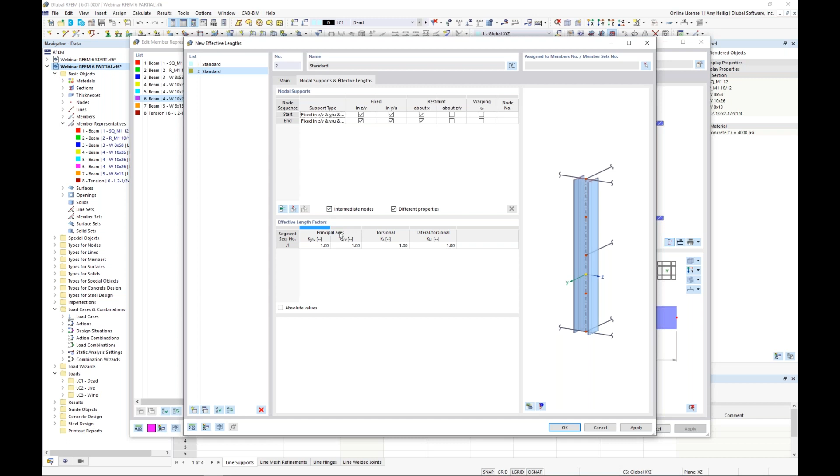So I can check on this intermediate nodes option, and then I can graphically select member number 11. You can see those smaller intermediate frames framing into the weak axis direction. The program says, okay, I see those intermediate nodes, and now I can tell it it is braced in the weak axis direction, the local Y direction.

Additionally, if we only had bracing at the top flange, or it was only braced at the bottom flange, we could set an eccentricity type down here at the bottom. By default, it will be set to both flanges braced in that weak axis direction. This was available for AISC in RFEM 5, but not for the CSA S16 standard, but now all standards will have access to this option.

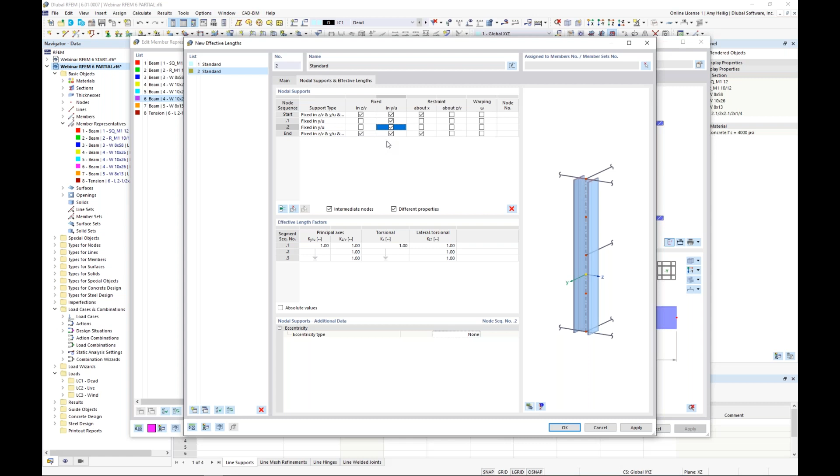So now when we go ahead and take a look at the member after we hit OK, we're going to see those intermediate supports shown here that represent the unbraced lengths.

Design configurations, same thing that we saw with the concrete, but this is specific to the AISC for steel. So we go into the strength configurations, just a few settings here related to the member design.

For AISC, serviceability, same concept. All that we're going to see here is our limiting deflection ratios where we can set.

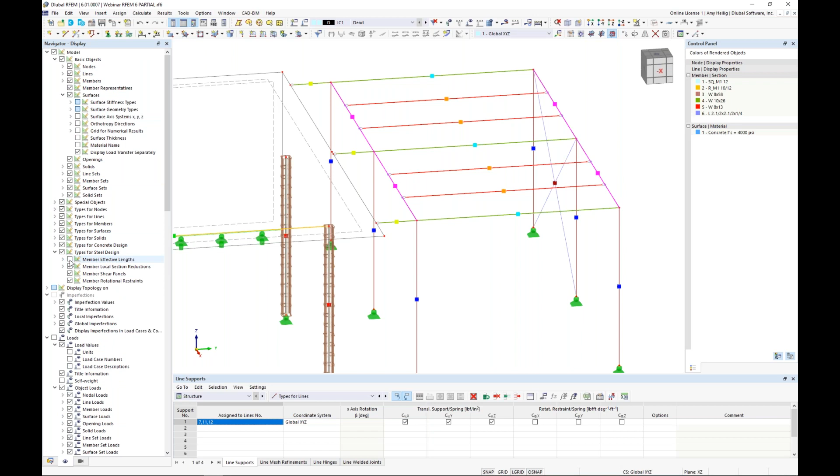Now when we click OK, I want to just show you guys graphically that under these display settings, I can turn on the member effective lengths under the types for steel design, and we can actually see these visually shown here. Now, if I make any changes to that member representative, these intermediate supports will automatically be updated for all 4 beams. So it's really important to take advantage of those member representatives rather than modeling each individual member.

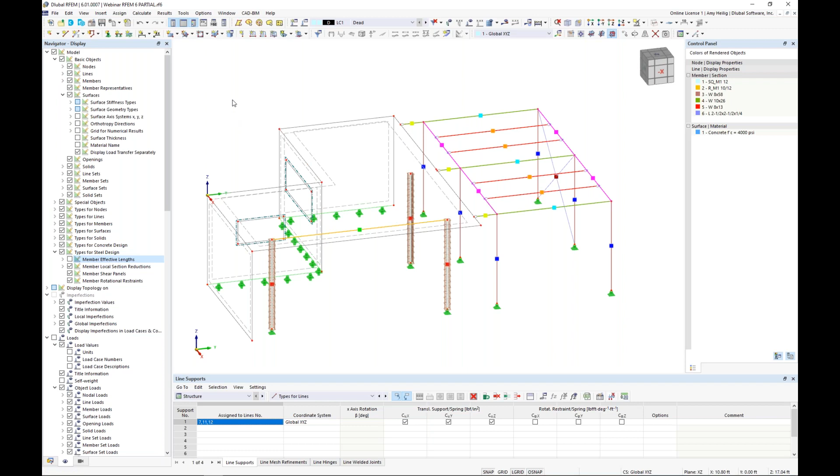Okay, so we are now finally ready to run our calculation. So I'm going to go to calculate, calculate all. This is going to show you guys the multi-core processor where multiple load combinations are solved at once for both the concrete and steel design as well as the analysis. You can see that solves very quickly.

So what we are presented with is a new tab under our navigator for our results, and we can scroll through to our different deflections for our various load cases and combinations. We've also moved all of these display settings related to the results right here within the navigator results tab as well, so for example the deformations.

If I want to turn on the members and I want to go ahead and adjust this to the sections that are colored instead rather than line elements, I can do so here.

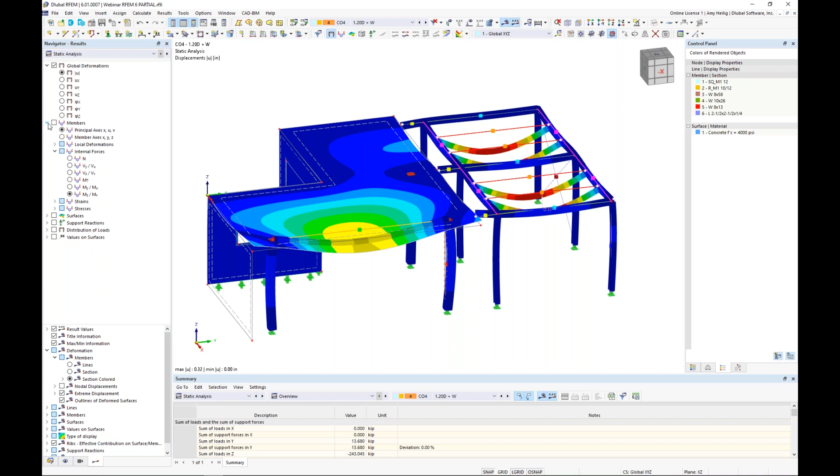We're probably also interested in member internal forces. So for example, I can activate this. I can view my axial forces here. I can view my shear forces. Maybe I'm interested in my bending moments.

But all of this information can also be shown to us in what's called a result diagram. So for any one of these members, I can right click, and under the members I have the ability to launch the results diagrams. This is the same information that I was just viewing, just in a little bit more detail along the full length of the member.

I can add this information to my printout report. I can scroll through to some of the different load combinations. And something that's new within RFEM 6 is that I can drag this over to a separate monitor and work in RFEM at the same time, and everything will update in real time.

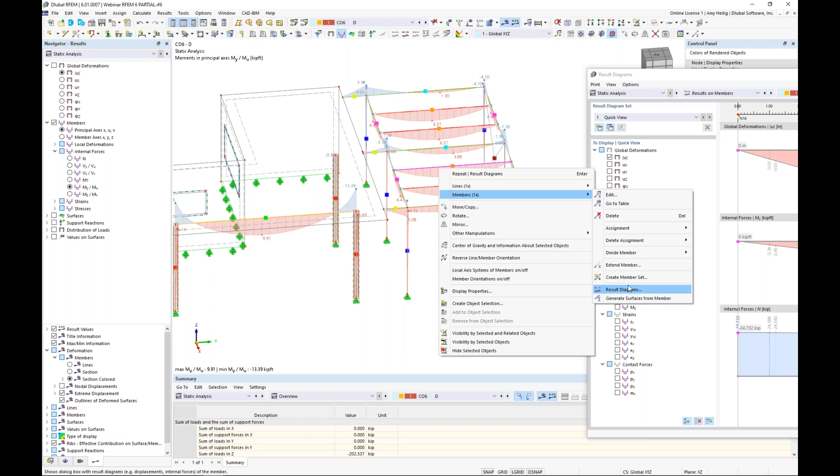So for example, if I change my load combination here and instead want to take a look at my result diagram for this beam, I can jump here to my member, to my result diagram, and you'll notice that everything updates here on my second window.

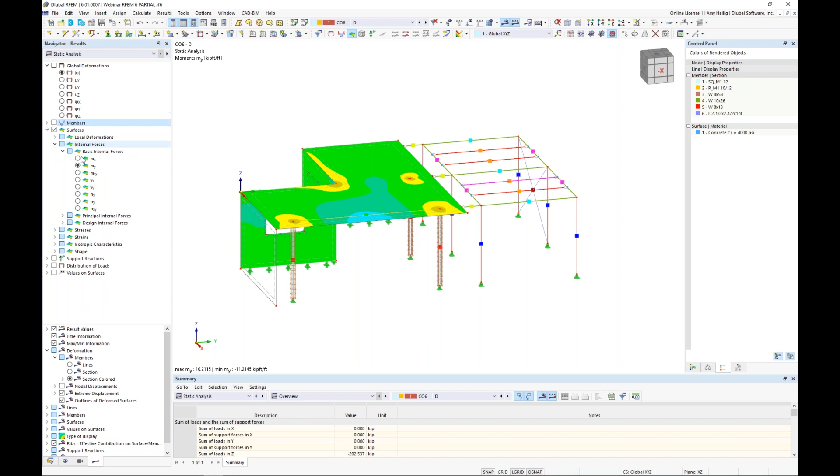All right, so that will essentially just give a brief overview of our analysis. I also should mention too that of course our surface analysis information is available to us here within these different options, including internal forces. Let us talk about the design.

So currently we're looking at the static analysis, but we can use this dropdown to choose the concrete design instead. So we no longer have this separate application of analysis then design. Everything is here together.

Now, one thing I wanted to adjust here, let's jump back to the concrete design, and I'm going to go back to the input data. I forgot to do this to begin with, and this is really, really important.

Under the design situations, you can see my LRFD load combinations are related to strength design. But my unfactored ASD load combinations, remember these two design situation types, I want to relate this to serviceability instead. The program says, okay, I need to redo those results, that's fine. Notice seismic has also been added according to Chapter 18, so this is something we'll want to adjust to make sure strength and serviceability are assigned to the correct design situation types.

Also, under objects to design, the program will automatically default to everything. If we only want to design certain members within the program, let's say our 3 concrete columns, we can graphically select them, members 1 through 3.

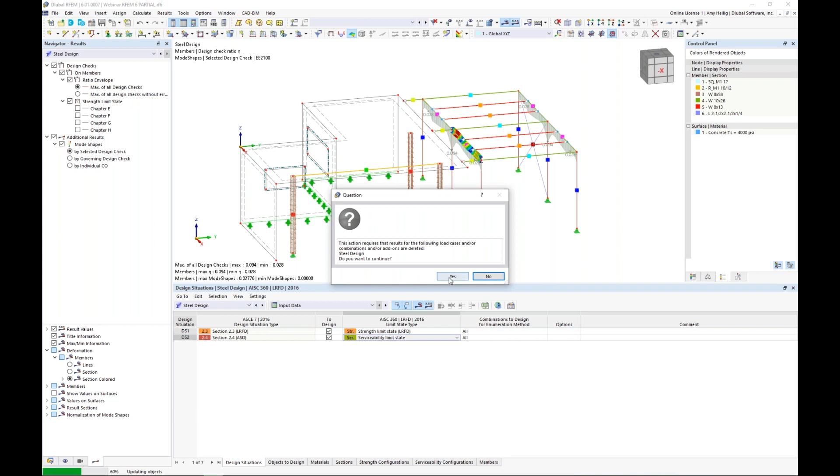Within my steel design, same exact concept, but I want to jump back to my input data. Under the design situations, my LRFD is going to be assigned to my strength limit state, and my unfactored ASD design situation type will be set according to my serviceability limit state design.

Objects to design, I really don't want to design everything here. I mean, we can, but we haven't input all of that information except for our 4 members. So we're now designing these 4 members, and let's go up to calculate all again. It's already run through the analysis, so you'll see the concrete and steel will just quickly solve again.

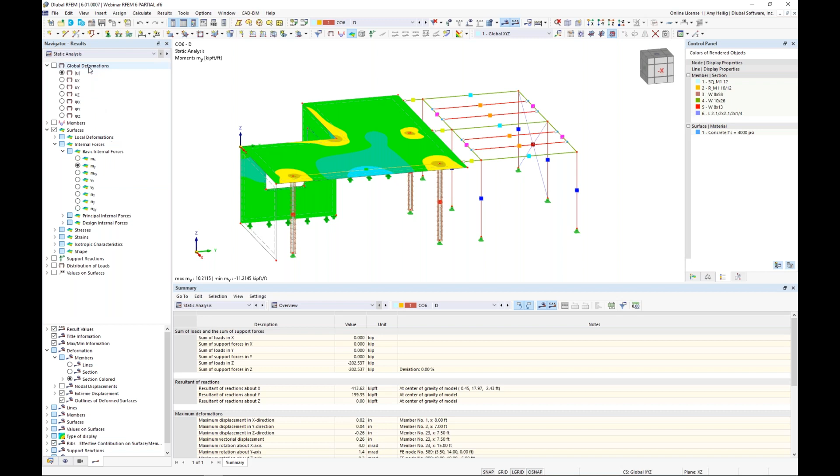So now we have already discussed the static analysis results, but we're going to jump here to the concrete design. You'll notice my navigator updates accordingly, and I'm currently viewing all of the various design checks, but I want to focus on this table where I can view the design ratios by member.

You'll notice here that I can automatically look at all of the various checks according to the ACI. The program syncs in the background to show me exactly where I'm at for that controlling internal force for that member.

Now we can take this a step further for any one of these checks according to the ACI to launch what's called our concrete design check details. This is what I mentioned in the PowerPoint, where we're now going to show you all of the formulas and the variables. We can add this information directly to our printout report as a graphic. We also can select any one of the other checks to take a look at the various formulas that are really coming into play for this ultimate design ratio we're viewing here.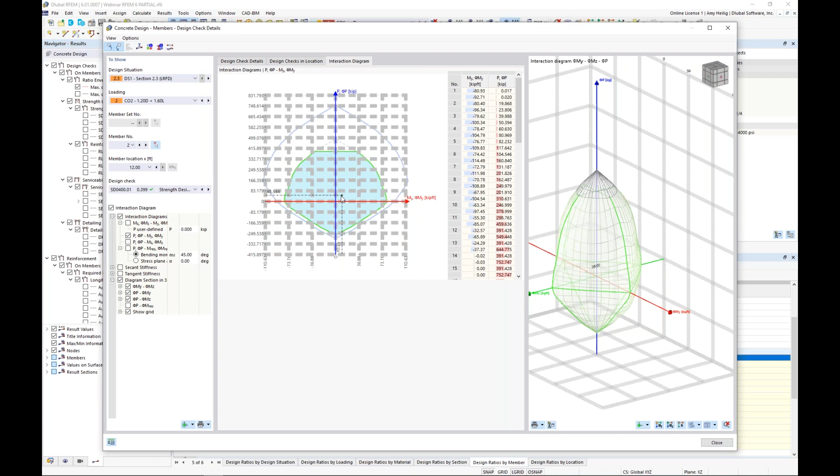Now, the long-awaited interaction diagram is also available. So I can activate this interaction diagram, and I have an additional tab showing the 3D interaction diagram for both axes of bending as well as the axial force. It will show you exactly the point that you land on with this particular column. Again, we can add this information to the printout report. This was a great new feature we've also added for concrete design.

So jumping to steel design, really same concept here for viewing our results. We're currently looking at the design ratios on the members. And as we click through these, the program is showing us these 4 members, and we can see the design ratio shown along the member length. We're giving you all of the checks here related to the AISC.

And again, for any of these elements, we can come here to the design check details. Just like what we saw with the concrete, we're able to see all of the formulas, the variables all listed out here. We can even expand out some of these settings to see how the member was classified: slender, non-slender, compact, non-compact, and so on. Of course, we can jump to any one of these various detail settings for one of the other checks.

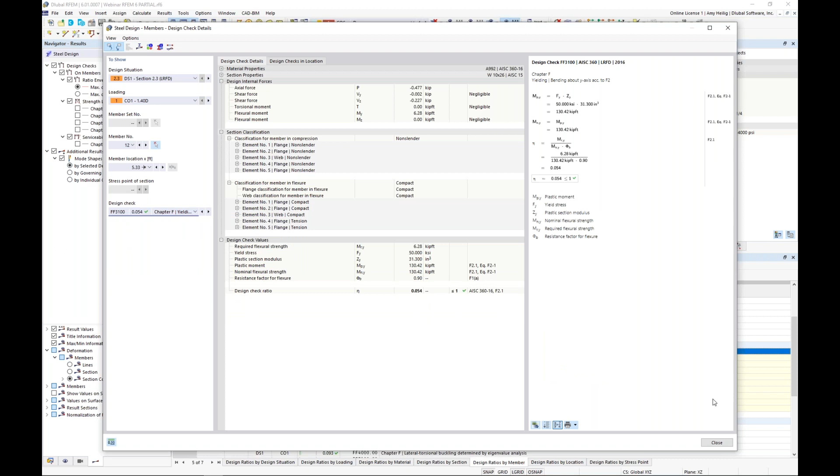So we can close out this, and notice everything is shown to us graphically here. Again, the table syncs to the navigator. What else you'll notice is that we're showing the mode shape that was used in the background to calculate the critical buckling mode for the lateral torsional buckling.

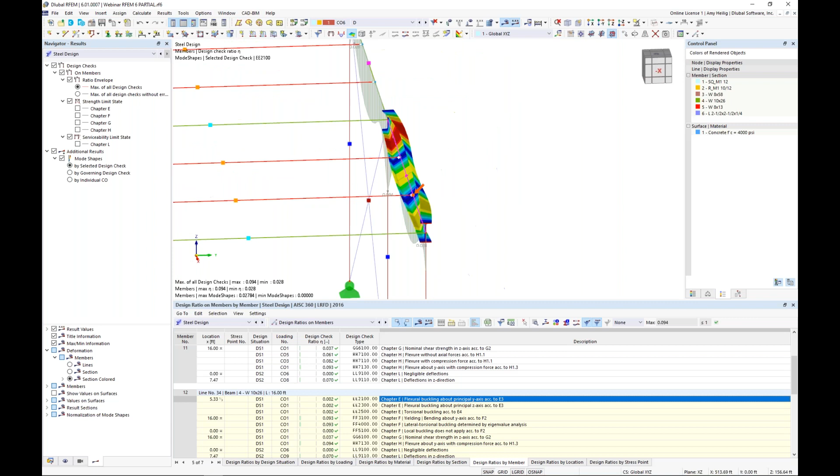So this is actually showing us our failure mode of this particular element, taking into consideration those intermediate supports that we previously set. Hopefully this is a nice overview of just how the analysis and the design portion can be run together within RFEM 6. Now, I know we only have a few minutes left, so I want to just cover the printout report and maybe a few new options there.

Up in our toolbar, we can create a new printout report, and up pops our printout report manager. This gives us the ability to turn on and off all of the different input data as well as the results. Once you have this set for what you plan to use for your company, for all of your models, go ahead and save it as a template, so you don't have to set this information every time.

You'll also notice that you can load a few default save templates, which will use template number 1, the input data and reduced results for today. So when I click save and show, this will go ahead and launch our printout report.

This is going to be a completely separate application. You'll notice that we have all of our chapters defined over here on the left-hand side. I'm going to collapse these. I know it feels a little overwhelming, but we'll see that they're categorized into these various chapters.

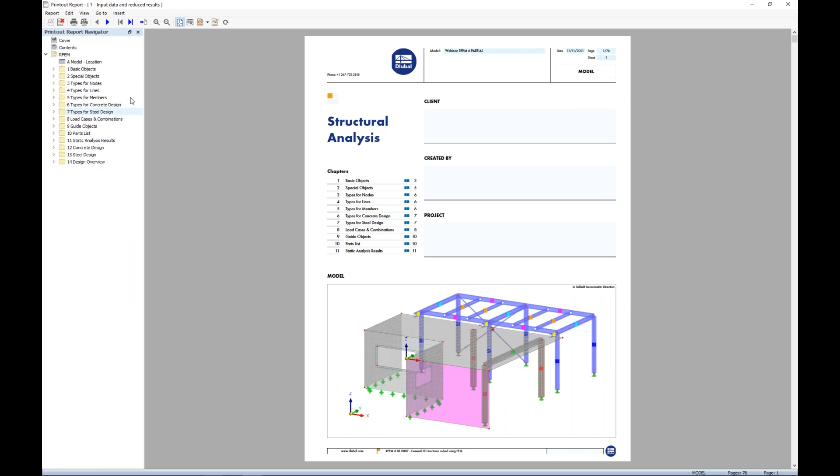One important thing to note is that I can actually move this printout report to a separate monitor and continue working in RFEM, deleting members, changing around my design, and this printout report will update in real time. All pictures, all data, so I don't have to refresh it. The program has the intelligence to update that printout report.

Now, this cover, I can go ahead and right click to edit it. I can change logos, any of the information that I've seen here. What's also relevant is our pictures. We can always right click on these pictures to edit them. This will bring us back into RFEM.

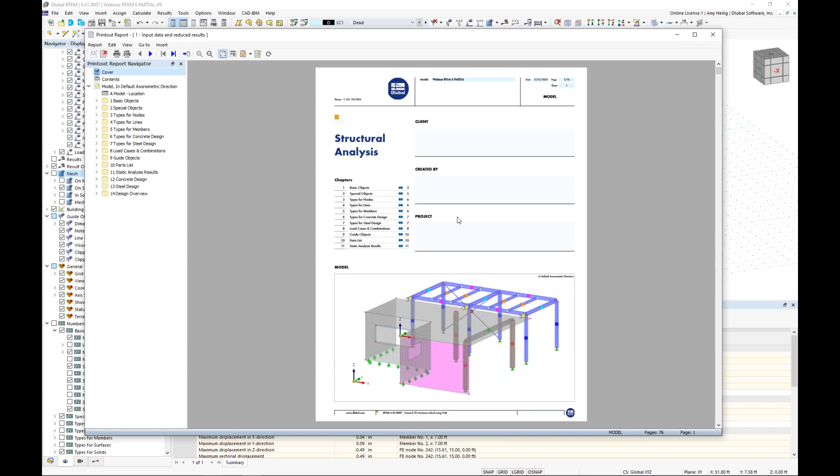If I decide I really would like to turn off my member representatives, well, I can go ahead and do so by graphically changing that modification here. Maybe I want to turn off my FE mesh, so I'll go ahead and turn that off, and I'm going to rotate around the model. I kind of hit that too soon—let us go back to the edit.

I only want to change the size of the window here. So I'll select these two elements to kind of zoom in, and I'll be able to select my window that will encompass that cover page. I click OK, and now we can see that this cover picture will be updated, not showing those member representatives or the FE mesh—I kind of rotated it around. Again, that's true for every picture within the printout report.

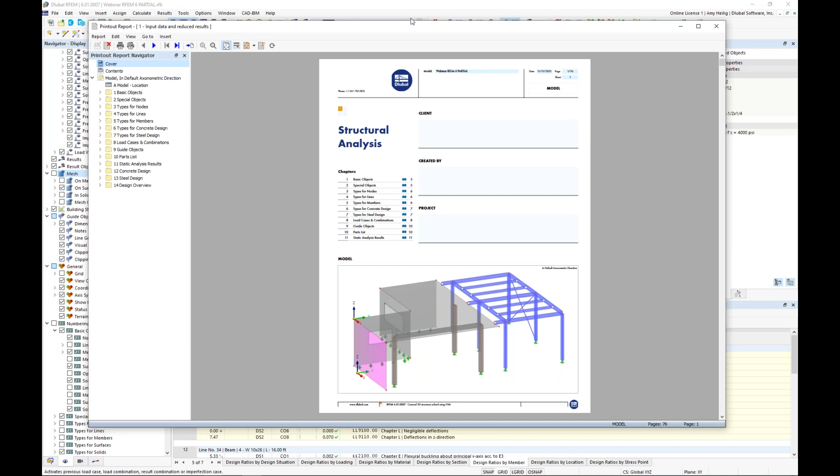If we go back to RFEM and we would like to add in our deflections as a graphic, let us jump back to the static analysis. We can turn on our global deformations here, and I'm going to zoom in. I'm really interested in printing off the global deformations for every load case and combination.

Typically we would come up here to print the graphics to the printout report, and I might be thinking, okay, I'll do it for dead load, I'll come back in, I'll do it for live load, and so on. But let us take advantage here of some of the various settings that we have. First of all, I'm going to change the height to 50%.

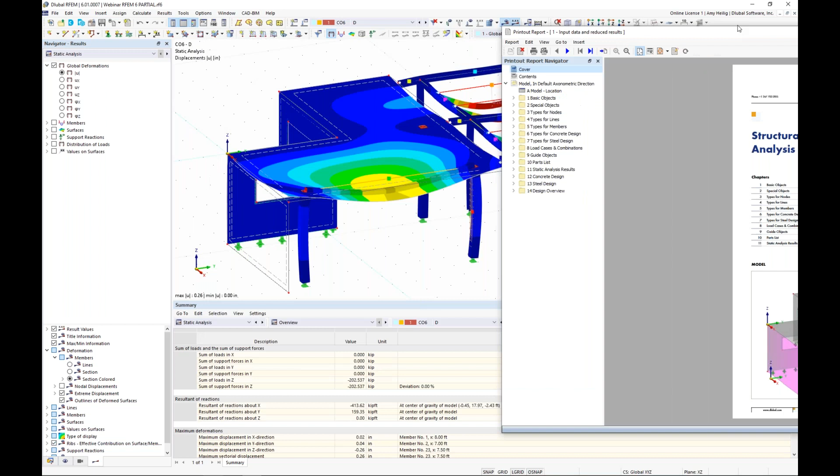Also, I'm going to take advantage of what's called the multi-print. Now with the multi-print, I have additional tabs here up at the top where I can go to my results, for example, and turn on the deflections for all 15 load cases and combinations. When I click Save and Show, you'll notice that the program and the progress bar at the bottom will run through each one of those load cases and combinations. Now you'll notice that all of my pictures are shown automatically for all 15 load cases and combinations.

Again, if I make any changes to the model, these pictures will automatically update.

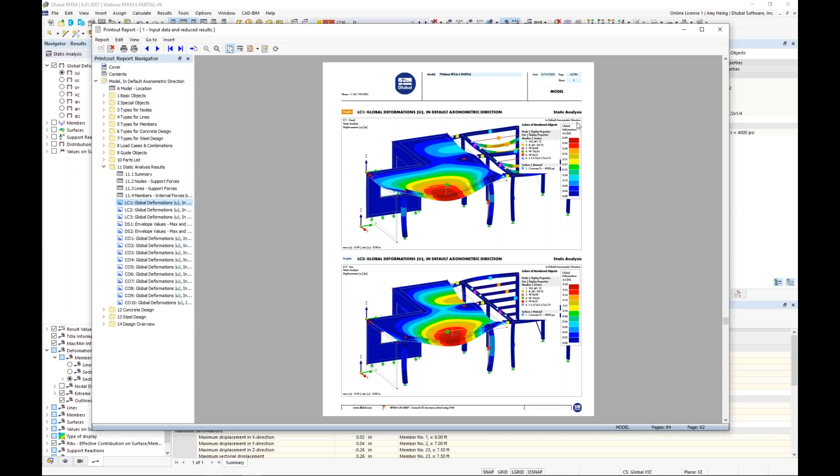Let's turn now to one other topic within printing graphics. Taking a look at my surface at the top, I create a visibility by selected object and view it in the reverse Z direction. I'm interested in this surface and the MY forces, so I turn those on and also turn on the values at each grid point for the MY value.

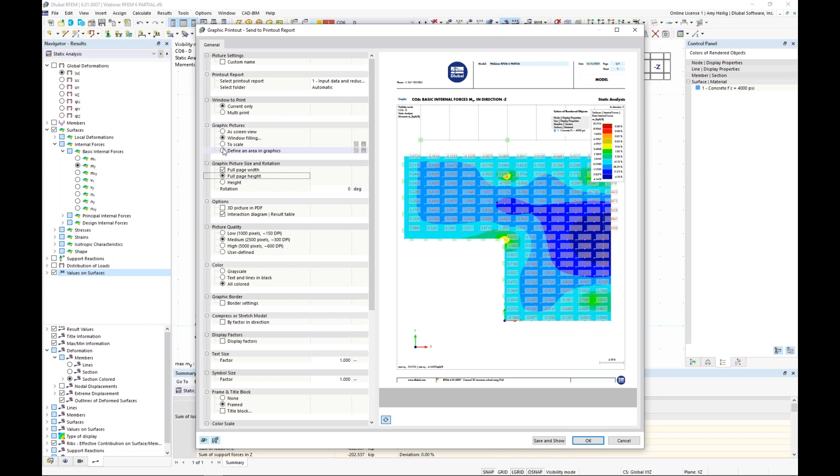I'd like to print this off to my printout report as well. If I choose current view only, the problem is it's pretty small and I can't really see what I'm looking at. So we have the ability to scale this picture, and I can choose a scale ratio of 1 to 25. That looks much better, but now we're missing a significant portion of the rest of the structure.

We've added a feature called tiled pictures. The program creates 6 pictures that will essentially be stitched together so we can view those settings a bit closer in better detail in our printout report. If I click Save and Show, the printout report automatically updates and now we have those tiled pictures shown here. That's also a beneficial feature.

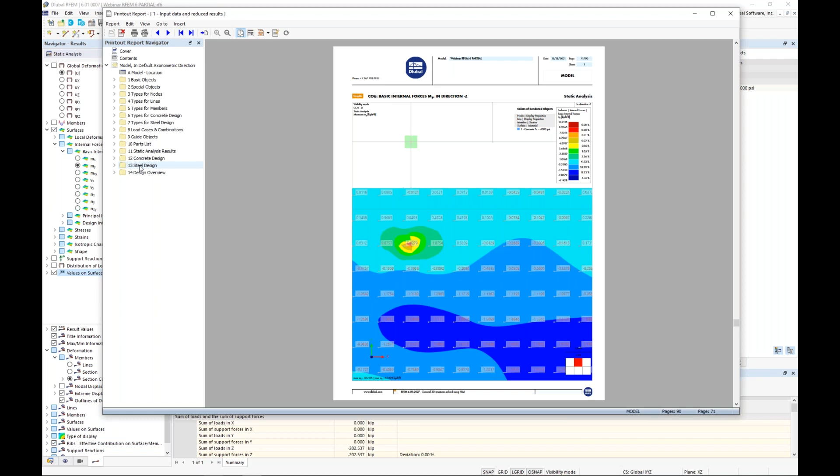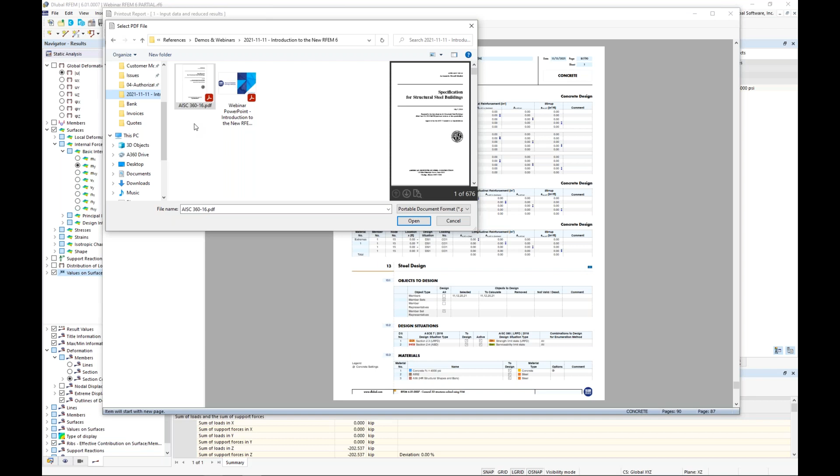The final thing to mention is inserting additional pictures you have saved to your computer, or PDFs. Let's say under the steel design, I want to incorporate a few pages from the AISC 360. I can right click under my steel design chapter and insert an image here, or insert a PDF below the item. When I choose this option, I can navigate to where I have my PDF saved of the AISC 360 and print off some pages there. I don't have to print off hundreds of pages and insert them all.

Rather, we'll choose pages 102 through 103. I click OK, and now when I expand out these details, the program has automatically integrated the PDF from the AISC 360 directly into this printout report. This can be really helpful for additional images.

Maybe you have separate technical papers you'd like to incorporate, but then we can transition right back to the steel design within RFEM. You can create new chapters, edit new chapters. If I want to move my steel design before my concrete design, all you need to do is drag and drop, and the program will automatically update. So this is really powerful in terms of our printout report, with many new features that will hopefully be helpful for you guys.